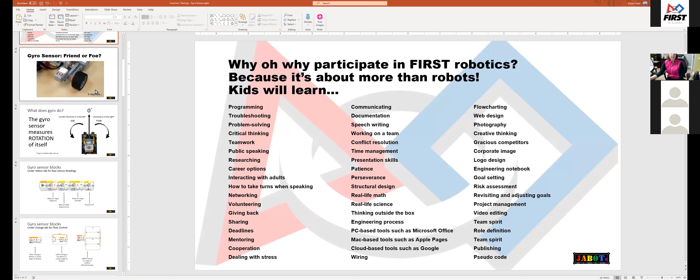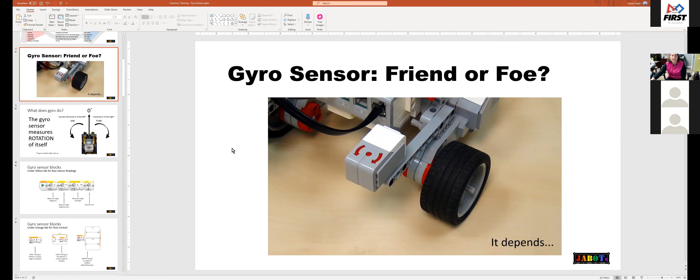So, gyro sensor, friend or foe? I asked a few FLL ex-FLL kiddos over the last few days, and the resounding response was friend, but it is not as friendly as a light sensor that you just stick on and off you go. The light sensor, you need to know how high to put it up the table and then you're good to go. This guy's got a little bit more of a personality that we need to deal with, and so we will show you what to do with this sensor here over the next few slides.

Basic information is that, what does the gyro do? The gyro sensor basically measures rotation of itself. And what I mean by that is that it is not measuring rotation of degrees on the motors or the wheels. So you can have wheels that rotate 360 degrees, but the gyro will rotate, say, 100. So it depends on where your gyro is on your robot, and it's how much it rotates.

If you have a gyro, I put it here—hang on, Alex, I want to say something, jump in. Right now, just slideshow. Oh, I see, okay, hang on. There we go, is that better?

So, if you have a gyro sensor that is installed with the right side up, meaning that the two little arrows are visible when you look down on it, a clockwise turn to the right will generate a positive angle of rotation from the sensor, and going to the left or counterclockwise will generate negative. It is possible to take your gyro and install it.

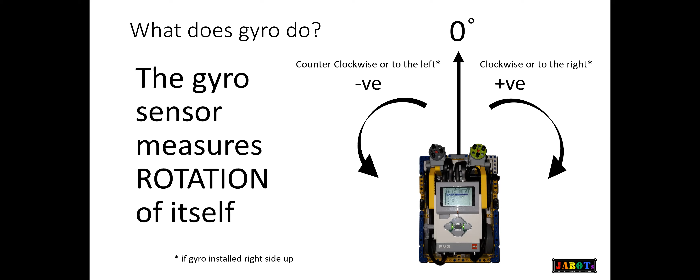So the first one here is if you choose to measure angle. The second one is if you choose to measure the rate that the angle is changing, which is something we, the Brickmasters, have never used in FLL. The third one gives you the option to do both angle and rate of change of angle. And the fourth one is if you want to reset your gyro to a 0 number. We'll get into more of these blocks as we go.

I just want you to know these are the different states you can have under the yellow tab for just raw sensor reading—so if you want to know how much the sensor has turned away from its 0 reading. The other blocks you'll be dealing with are the orange blocks.

And what those are is your normal flow control: the wait block, the loop block, and the switch block. But you can give each of these a condition to look for something from the gyro.

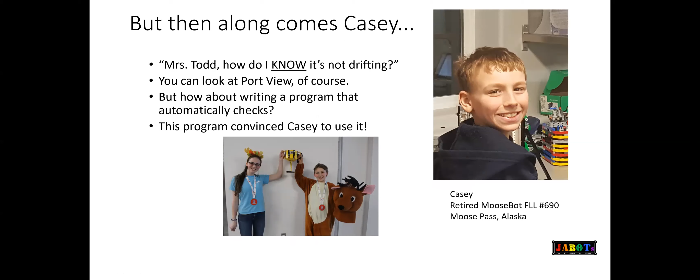So we're going to have a look at this program. Hang on, did I put the drifting—I didn't put it in there. Here it is, I'm in the wrong order. Okay, so this is the drift check program that you can use at any time, and we'll run it here in a minute and I'll show you what it does. So you start the program, and then the first block that you see is the reset on the gyro.

I do that when you start a program. If you don't know this, when you start a program, all sensors, including rotation sensors in the motors, are reset to 0. But because this program could end up within another program, like a master program, I've made a point of including the reset block at the very beginning. If you don't do that and you run any gyro program without resetting it first, it may not give you the results you want. So I put it in here just as a reminder.

Then we open up 2 variables. If you haven't worked with variables, this is a great way to teach your kids about using variables in this very simple program. So I open up 2 variables, both numeric. One is called Gyro 1 and the other is called Gyro 2. I just set them to 0 to begin with.

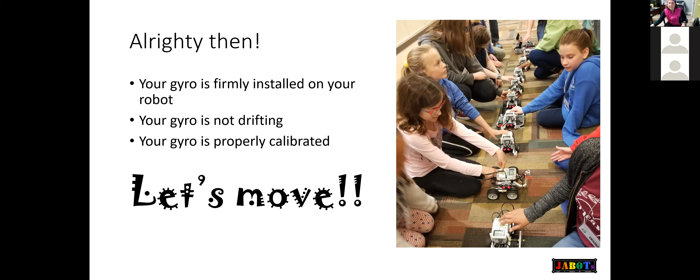Okay, so going straight, which I've always said, do you agree? Yeah, hardest thing to do in FLL. By far the most difficult thing to do. If you can go straight reliably, that is more than half the battle, in my opinion.

So here is the general idea. When you reset a gyro, it will set an invisible line straight ahead that is a 0 reading. Basically what we want to do is follow that 0 reading. If the robot is pulling towards the right, then what we want to do is correct by telling it to turn left, to get back to the 0 line.

So to create a left turn, we're going to generate negative steering, because in the move steering block, negative steering makes you do a left turn. So a positive gyro sensor reading is going to be converted into a negative steering in order to generate a left turn. And then the exact reverse, if your robot is pulling to the left, then we want to correct with a right turn.

We're going to create a right turn by applying positive steering, which means that a negative gyro reading is going to be converted into a positive steering. Basically, if we do this over and over again, then the robot will self-correct and go straight no matter what. That's the general idea of using a proportional straight program using the gyro sensor.

So let's dig in. This is a very, very simple but extremely effective program to go straight using the gyro.

Especially this piece of code is something that you could end up converting into a My Block, and you end up using this potentially hundreds of times in 2.5 minutes, so you have to make sure that you reset your gyro at just the right times. In other words, anytime you want to follow a line, you're going to set that as a 0 line. So every time you do that, you reset your robot, because if you just are going up and down this table, the gyro is just going to keep adding and subtracting degrees of rotation unless you tell it to reset to 0.

Okay, so this block is going to be needed, maybe not, depending on what it is that you're doing. The loop I have in there right now says infinity, but what you're going to want to do is play around with that loop to generate just the right amount of distance that you want the robot to do. There's different ways you can do this. You can do it with the radius of the wheels. You can get really, really fancy with this. Right now, I've kept it very simple.

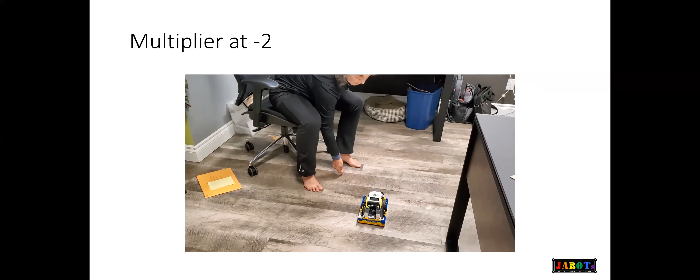All right, you guys see that? Hear that? Yep, okay good. I was pretty proud of myself there -- I did some video editing and everything. All right, here we go. So that was -2 on this robot. Obviously, that looks good, right? Okay, hang on. Here we go, this one's fun.

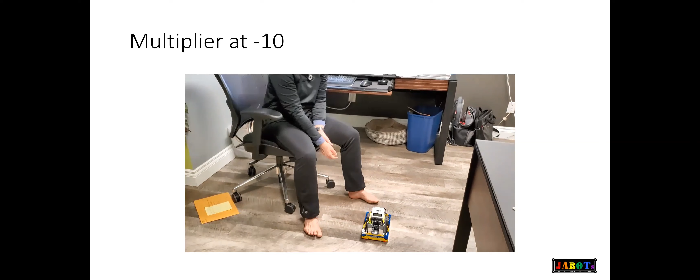Okay, make sense? All right, and then at -0.5 of correction.

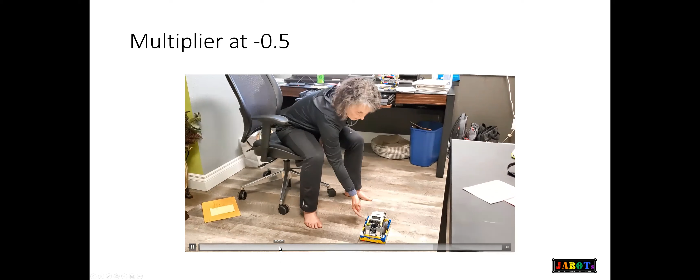Elaine, I don't know, the audio just isn't working for me now. Can other people hear? I cannot. Okay, okay, I'll tell you. Okay, so I assume you could see, just couldn't hear? Yeah, okay, so--

-10, right, was way too high. You could see the robot -- the kids will have a blast with this. I remember Jackson playing with this several years ago, and he had the thing going in circles because it was just completely lost, way over correcting.

-2 was pretty good, and then -0.5, which is the video you just saw there, works, but it's a very, very gentle, very gradual correction.

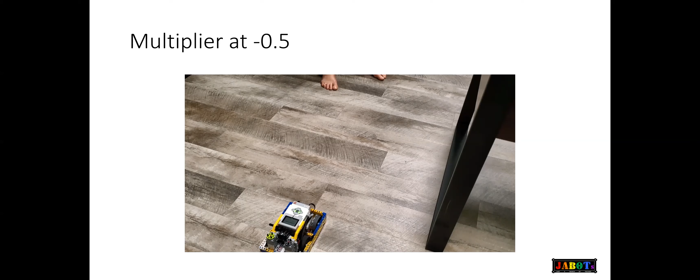Depending on your situation, it's not necessarily that this is good or that it's bad. It depends on the situation you're dealing with. Typically, you want a relatively quick response back from the robot because you don't want it to drift off its straight line too much. So the multiplier needs to be high enough that it gets itself back online relatively quickly, but not so much that it gets itself into this crazy loop.

So what I'm saying here is the combination of the multiplier and the power level is going to depend on your robot, and you'll have to experiment with it a little bit. What you'll find as the kids experiment is they'll find there's a range that works really well. If you have a short distance you're traveling or a long distance, if you're going slowly or quickly, you may end up moving that multiplier around a little bit to get you just the right correction as your robot's going straight.

The other thing that could impact that is the shark tank from Animal Allies or Nature's Fury. The kids that designed it dragged the shark tank on the left side of the robot, and it put a huge amount of stress on that side. If you just did a green block, the robot, because it's dragging something on the left, wasn't able to go straight. You can accommodate for that a little bit, but depending on the table you're on, that wasn't very reliable.

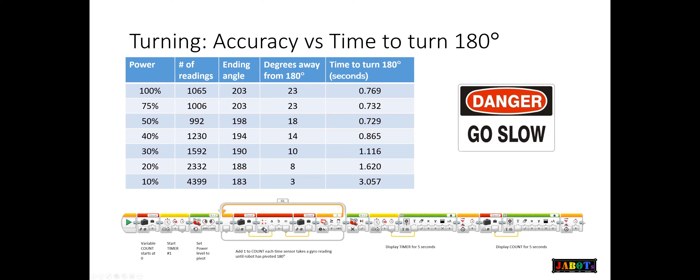It's sort of in that 10 to 20 range when you turn, and you can solve for the inaccuracy. The reason it does that is because of the way the gyro works - by the time it realizes it's at 180 degrees, there's a lag between that measurement being taken and the momentum of the robot slowing down. So there are a couple of different ways we can accommodate for that, and now we'll talk about that.

So, how to compensate for overturning. The first thing is just go slow. When they want to go 100%, this is going to hurt them if they want to turn that quickly.

Use the greater-than-or-equal and less-than-or-equal option rather than strict greater than or less than. That means as soon as your gyro detects 180, or 181, or 182 - whatever the first thing it detects - it's going to stop. If you just say greater than, you've added by necessity one degree of error right then and there, because when it detects 180, it's not going to stop, it's going to keep going. So make sure you use greater-than-or-equal and less-than-or-equal.

One option you could use, and this is what my kids ended up doing, is breaking the turn down into two steps. They started fast, at 50%, and instead of going all the way to 180, they went until they saw greater than, say, 150 - oh, I've got the wrong power on there, I'll have to fix that - then they lowered the power and kept going for the rest of the turn.

That was it, all I wanted to say here was just sensors in general. If you look on the rubric, sensors are there. They're part of what the judges are looking for. Whether you use a gyro, just color, touch, or ultrasonic, any of those will work to the kids' advantage in judging to increase the reliability of their robot while it's on the table.

5:15, that was pretty good. Pretty good planning. Any questions?

Anybody have questions? I'll say, especially the newer coaches that are on, Elaine and Alexa are great people to ask any design or programming questions, not just about the gyro.

We started being able to get reliably to the other end of the table only once the kids started playing around with the light sensors and the gyro sensor. Otherwise, getting across 8 feet or 7 feet this year is like 100 miles in a car. You can do it once in a while and get lucky, but if you want to do it reliably, you have to take advantage of these sensors and learn how to use them.